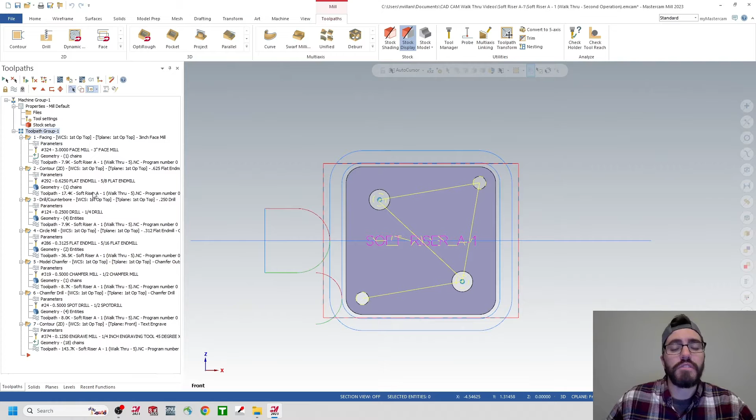All of those toolpaths are out here on the left-hand side in my Operations Manager. I can also see those toolpaths here in my viewport, all those different lines. And if I want to see what that finished result looks like, I'm going to go up here at the top left in the Toolpaths window, and click on that half-pipe looking icon for Verify.

We can see what those toolpaths will look like as they cut against the stock material. So when I hit play, we can see our face mill as well as our contour, and then we hit these 4 drilled holes, and now we're opening up the 2 oversized holes with circle mill.

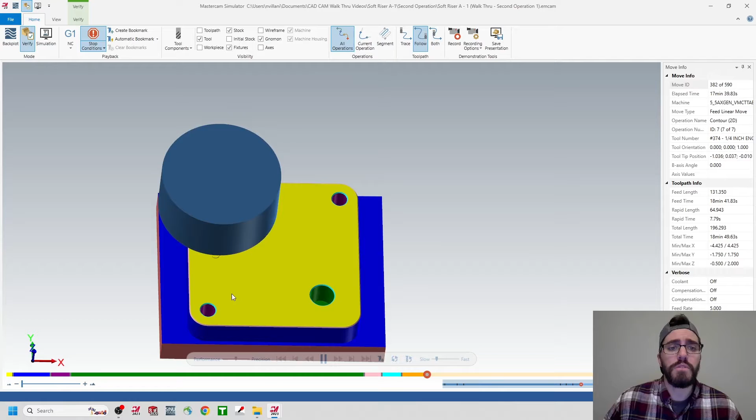We'll clean up the outside edge with a chamfer mill and then a chamfer drill on each one of these holes, and then we engrave the Soft Riser A-1 at the center of the part. And that's going to complete first operation.

As we move into second operation, I actually want to use this finished model here from Verify as my stock material. That's because when we're in second operation, we're eventually going to reach the depths or the extents of our contour mill as well as some of these holes.

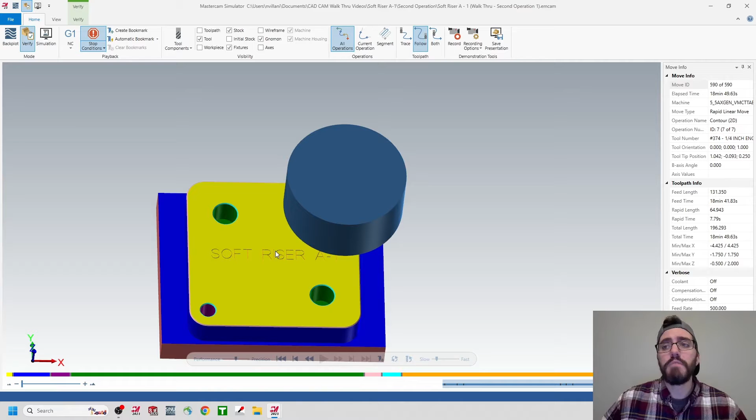Now we're starting to get into this theory of multi-op programming, and that's going to be useful as you start to get out in industry. So let's go ahead and back out of Verify and get started here in second operation.

Let's begin by cleaning up our Operation Manager, that way we can make some room for our second operation toolpath. Over here on the left-hand side in my Operation Manager, all I'm going to do is just hit the minus button next to each one of my toolpath operations.

So here next to facing, there's a minus button. We'll click on that, and that's just going to compress that folder down. We'll continue, and we'll hit that next to contour, drill, circle mill, model chamfer, chamfer drill, and contour.

We can also simply just minimize this entire folder here, so that toolpath group 1, I can hit the minus button next to that. However, that just hides all your toolpaths, so you won't be able to make any changes unless you expand out that folder once again.

So if you want to see them, you just have to hit the plus button next to toolpath group 1, and that's going to bring back all of your toolpaths. Now that we've made some room in our Operation Manager, let's create a secondary toolpath group for second operation.

Now, you have to be careful what you currently have selected. For example, right now I have my toolpath group 1 selected. If I create another toolpath group, it's just going to place that within this folder. And you want to keep those two programs separate.

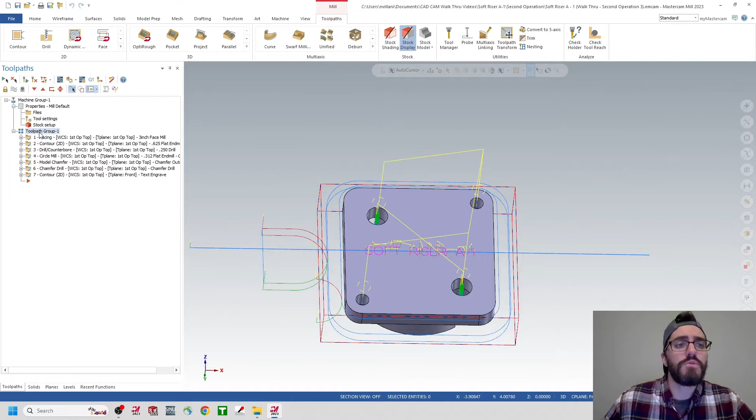So the best way to do this is to come up here to our machine group 1, click on machine group 1, have that selected, right click on machine group 1, then come down here to groups, and you just want to add a new toolpath group.

If you add a new machine group, that's going to add another machine. We want to stay within that machine so that we can maintain our tool library and our stock material. So go down here to new toolpath group, and you'll see that will populate a toolpath group 2 beneath that toolpath group 1.

Now, toolpath group 2 is currently highlighted. It's allowing me to do a text change or a rename. So I'm just going to title this second operation.

And we can do the same thing here to toolpath group 1. All we have to do is click, wait, and click again, and that allows me to open up that text edit box. So I'll click, wait, click again, and now I can rename this first operation. So now we can clearly see what's first operation and what's second operation.

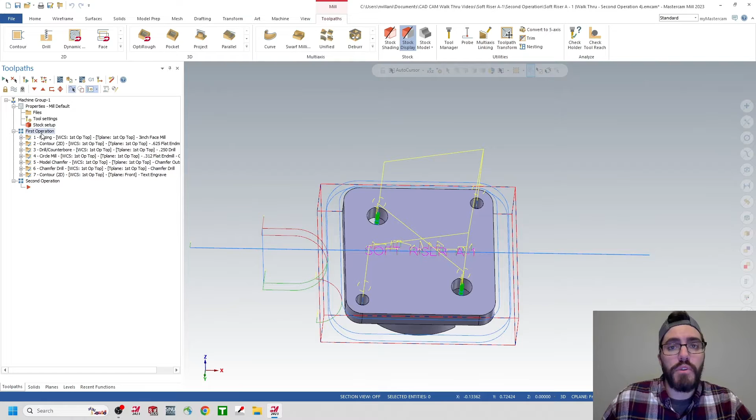So let's go ahead and click on our second operation toolpath group, and I want to make sure that our red arrow is beneath this so that any new toolpaths are going to be created in this folder. Now, when we look at these two operations, they're both beneath Machine Group 1, which means they're driving from the same stock setup that we created for first operation.

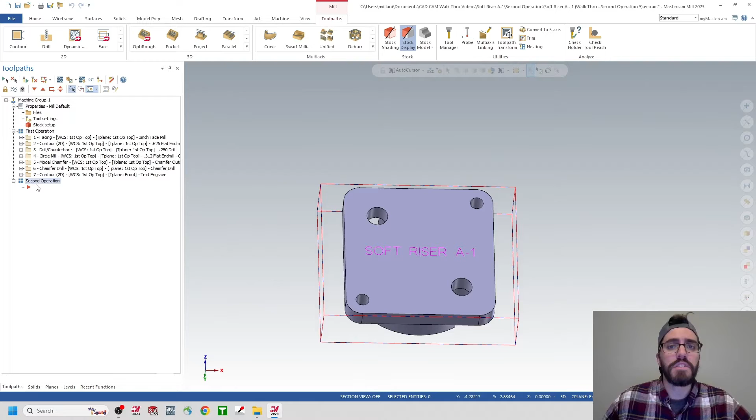However, for second operation, I want to see that finished verified model we were looking at earlier after all of these toolpaths. So let's jump over into our top ribbon bar and find our Toolpaths tab. Inside of Toolpaths, look for an icon called Stock Model, located in the Stock section right next to Stock Display—it's this gray half-pipe looking icon called Stock Model. We'll click on that, and it's going to open up the stock model window.

Beneath the window, we can see in our Operations Manager that we're trying to create a stock model for second operation. So back in the window, let's rename that stock model First Op Finish. Then we can associate a color to the mesh file we're creating so it's a little easier to see our toolpaths and verify.

Over here to the right where it says color, it's currently set to gray. There's a color palette here—if we click on that, it's going to open up this window. I like using something nice and bright so I can see those toolpaths in verify, so I'm just going to click on this pink color right here and hit the green check mark.

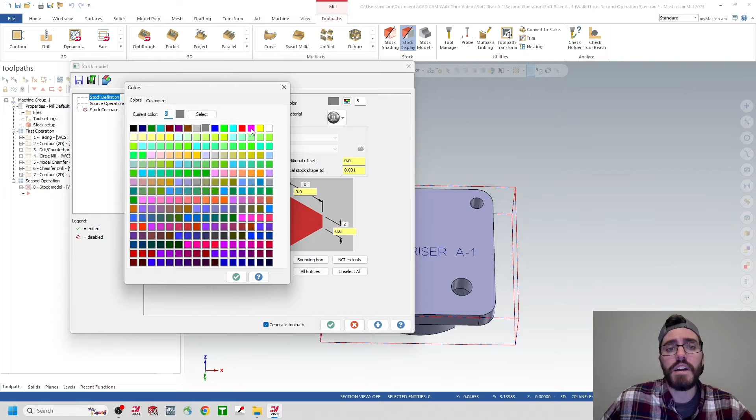Then we're going to work our way down, and we're currently working from the stock plane First Op Top, and that's correct because we want to be pulling from that top plane that we set up for first operation so that all of our toolpaths run against that plane.

As we continue down, it's asking what we want to use for a reference stock material. We've already set that up here in Machine Group 1 where it says Stock Setup, so let's go ahead and click Stock Setup right here. When we click on Stock Setup, it'll actually match up our X, Y, and Z extents.

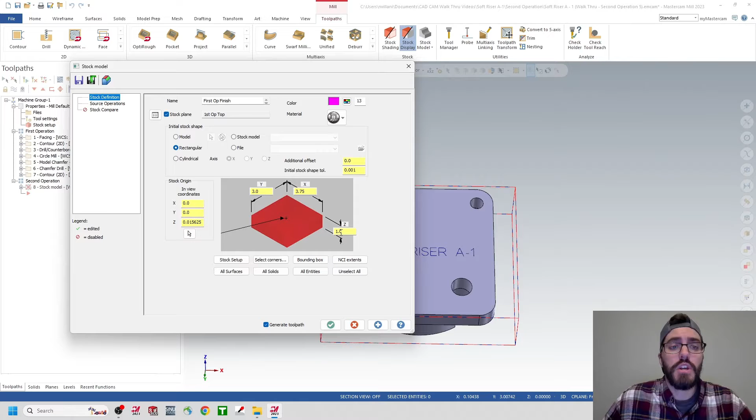Now that we've established our stock definition, we're going to jump down one tab into Source Operations. Inside of Source Operations, all we're trying to do is tell the stock material what toolpaths we want to run against it so that we can create that mesh file.

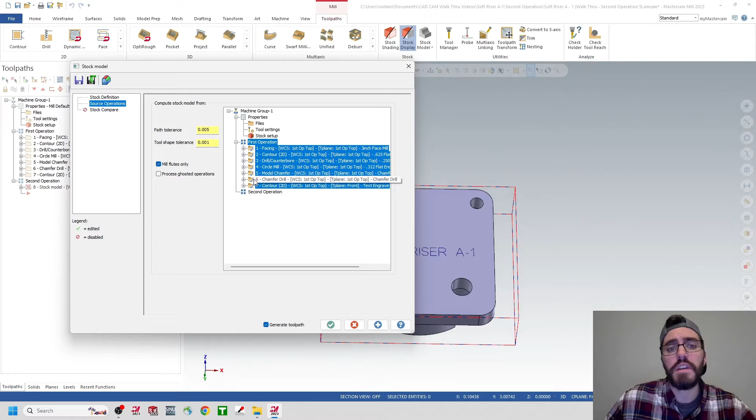So over here, we're just going to select our first operation toolpath group, and we can see that all of our toolpaths have been selected—there's a check mark next to each one. Then when I hit the green check mark, it's going to create that mesh file that we can use as the stock material for second operation.

Now, if you're working in MasterCam 2024 and up, you don't have to reassociate your stock material every time you create one. The software will simply recognize that anytime you have a stock model in your Operations Manager, it's going to be used in Verify while you simulate your toolpath later. However, if you're working in MasterCam 2023 and down, you will need to reassociate any stock model you want to use in Verify under the simulator options.

So on the left-hand side in our Operations Manager, we're going to go to the top of the window and find the icon with three little waves and a gear in the corner—it's actually just to the right of our Verify icon. Click on Simulator Options, and this is going to open up our Simulator Options window, and by default we're always going to be pulling from the stock setup to be used in Verify.

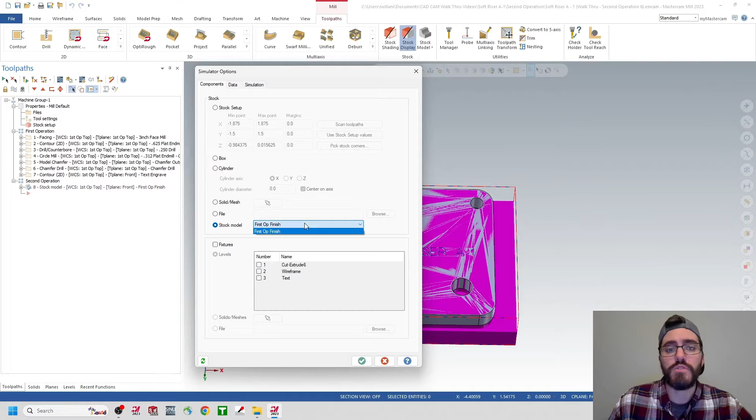We just want to relink this to that stock model we created for that First Op Finish, so go down to the bottom and click on Stock Model, and we can look for the First Op Finish, or hit the drop-down menu and choose from any other stock models you've created. We'll hit the green check mark, and now when we create toolpath, this is going to be used whenever we hit Verify.

So now that I have everything I need from first operation, let's go ahead and create a new plane for second operation so that all of my toolpaths will run perpendicular to the front side of the part. However, I really can't see any of that geometry right now because it's being hidden by the stock model that we just created.

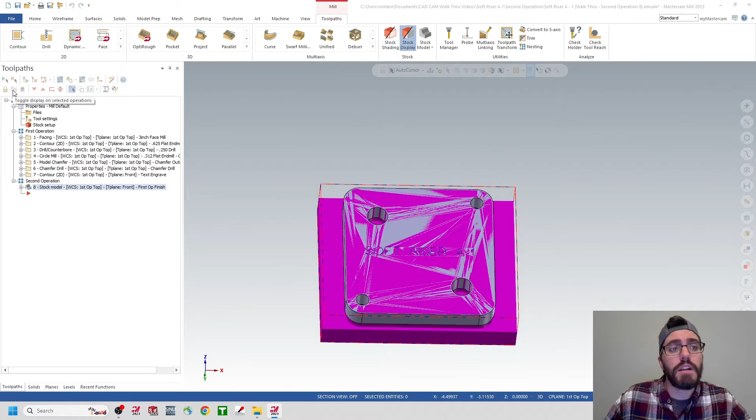So what we need to do is go over to the left-hand side in our Operations Manager. You'll notice that your stock model, the one we just created, will operate just like toolpath geometry. Make sure it's selected with a check mark, then move to the top of that window and find those three waves to toggle the display to selected operations. Clicking on those waves lets me turn my stock model on or off, so I'll turn it off so I can see the top side of my part and create that plane for second operation.

Let's jump down into the bottom left of our Operations Manager. We're currently in the Toolpaths tab, so we'll head over to the Planes tab. Click on that, and we're going to do the exact same thing we did for first operation, where we create a dynamic plane, attach it to the top edge, and then rotate it so that Z is pointing up.

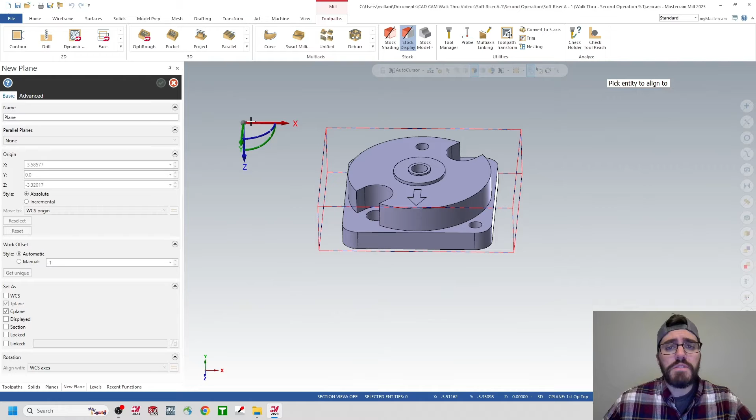Up in the top left where it says Planes, right underneath that, I'll hit the green plus button, expand the menu, and find the dynamic option. You'll notice we have that gnomon attached to our mouse now, and I might need to zoom into my part. I want to line this up with the inside edge of the blind hole at the center of our component, so I'll click on that edge. Then we're going to rotate this around so that Z is pointing up, which means rotating around the X or A axis. I'll click on one of these red segments and stay inside this wheel to get to 180 degrees so Z is pointing directly up.

I'll click right there, and then name this plane on the left-hand side 'second op top.' We'll hit the green check mark, which brings us back into our Planes tab. We want to make sure our WCS and C&T planes are all linked to that new plane we created for second op top — right now they're still linked to the first op top from first operation. So inside these columns and rows, I'll link the WCS here to second op top, as well as the C and the T plane to second op top.

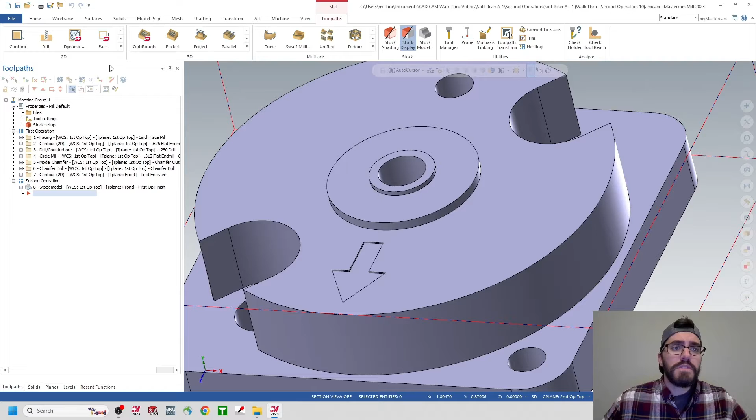Let's jump back into our Toolpaths tab in the bottom left of our Operation Manager — right now we're in the Planes tab, so we'll go over to the left and find the Toolpaths tab. The first toolpath operation we're going to look at is a face mill so we can clean up the top edge of this part. Inside our 2D gallery, we can either expand this out or click here from the top row to find that face mill. Click on face mill, and we're going to treat this exactly like we did for the first operation.

I'm going to zoom out a little so I can see my part better, and change this from solid chaining to wireframe chaining — I can still pick up that wireframe we had from first operation. I'll click on this top edge here, and I can either click the red arrow or click the fast forward for endpoint forward. Click, click, and I'll get a nice yellow box around that top edge. We'll hit the green check mark, and that opens up our parameters window.

We'll jump down into our Tool tab, and this is still pulling the same tool library we were using for first operation because we're currently in the same machine group. So pick up that 3-inch face mill and we'll type a note here for 3-inch face mill. Then we'll jump down into our Cut Parameters, which is still going to pull the same settings we had for first operation. Our cutting method is going to be 1 pass, and exit and approach distance should be 25%.

And the stock to leave on floors should be 0. We'll go down here to depth cuts, and again we're still going to pick up those same settings. So it's going to be 10 thousandths max rough step, and then we're going to keep that tool down.

We'll go down here to linking parameters. Just make sure that each one of these are reading absolute, absolute, absolute, and absolute. Top of stock, we can double check that, but it's 15 thousandths. If we click top of stock here, we can click on the top corner of our stock material, so we are getting that 15 thousandths.

However, the depth should read 0 because we want to go to the top face of that plane we just created, or the top edge of this part. So click on depth, and we just want to click on that inside edge or that top edge of the hole going through the center of the piece. We'll click there, and we can see that it's registering as 0, which matches the second op top plane we just created. So a good double check for us, especially if you're moving from first operation to second operation in the same MasterCam file.

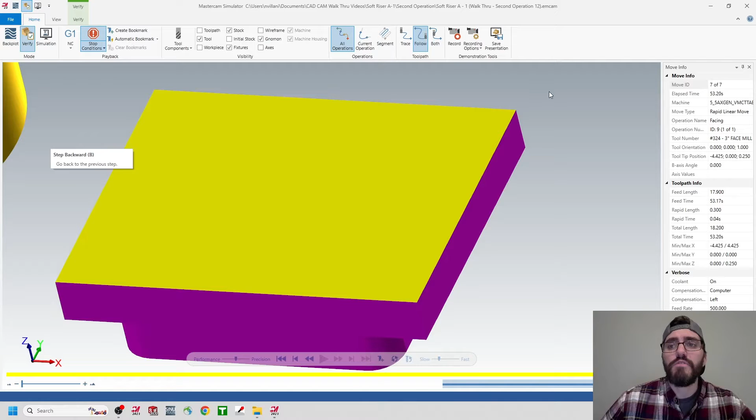So we'll come down here and we'll hit play, and we can see that 3-inch face mill is going to cut across the top, and then it's going to come back. So I think it's safe to say that we set up everything correctly and that we have our second op top in the right orientation, as well as that first op finish for our stock material. So let's back out of here from Verify and we can continue programming.

Now the next toolpath that I want to show you is one of my favorites in all of MasterCam. It's called 2D Dynamic Mill, and we can use this for intelligent metal removal for multiple different applications. So we're going to go over here to the top left-hand corner in our 2D toolpath gallery, and we can either pick from the top row or we can hit this drop-down menu, and we're going to look for this icon with the swirl and then a red arrow attached to it.

So click on Dynamic Mill, and this is going to open up your chaining options, and this toolpath is going to work a lot like face mill and contour mill combined. So we can choose automatic regions, however I want to show you how to set this up manually so you can use it for almost any application. So we're going to come down here to machining regions, and we're going to select this mouse button for select machining chains.

And this is going to be the face mill section of this. Again, this is why I always set up my wireframe geometry to match the stock, because it makes toolpaths like this really easy. So here inside the chaining, make sure you are set to wireframe. We're going to choose the chains, and we're going to select this top edge, and we're just going to go around that top surface like a face mill until we see the entire top face selected there in yellow. We'll hit the green check mark, and now we have to set up our machine region strategy.

So we have to tell the toolpath, do we want to stay inside that selection we just made, or approach from the outside? We don't have any geometry or details to worry about, so I think we can approach this from the outside here.

We'll change this to from outside for our machine region strategy. The last thing we need to do is tell the tool what geometry to avoid as we're cutting the selection. So we'll come down here to avoidance regions and select the avoidance regions chain, which operates a lot like 2D contour. We'll change it from wireframe over to solids, deselect the face option, and we only want to select the loop.

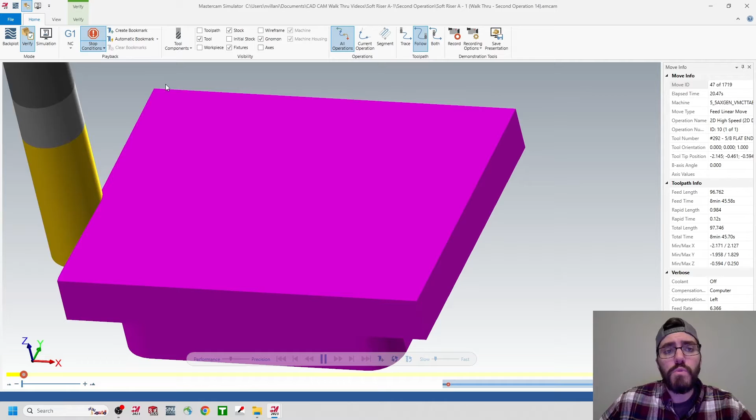We can see the first op finish being used for the stock material of the simulation, and I'm just going to slow down my playback speed so I can talk about this toolpath as it's cutting. So I'll hit the play button here, and we can see as the tool is traveling around the part, we aren't just doing straight up and down cuts. We're actually entering and exiting the part at different depths. We can see that there are radii in some of these corners, and this is to optimize the cut in the most efficient way possible to improve the surface finish and increase the life of the tool. And that's the intelligent design behind the 2D Dynamic Mill.

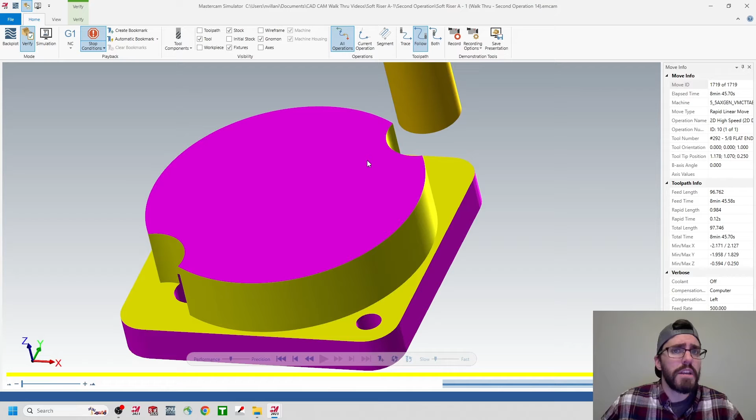As this finishes, I want to compare the verified model against the 3D model that we brought in from SolidWorks, because these cuts here in the corner are looking a little light. So here inside the Home tab, I'm going to go to Visibility, and I'm going to turn on my workpiece, which is going to be that 3D model, and then I'm going to toggle my stock so that it's transparent. You can see that it's not going as deep as I want to, so I actually need to come back and clean up those corners with a separate toolpath.

So let's back out of Verify and look at that next toolpath. Now, the 2D Dynamic Mill worked very well for us, so I want to see if I can use that toolpath again to clean up these inside radii for both of these slots. However, instead of creating a brand new toolpath for 2D Dynamic Mill, where I have to set up my machining regions, my cutting strategy, and my avoidance geometry, why don't we try and copy and paste our last toolpath and make some adjustments to our parameters.

Now, I want you to select that 2D Dynamic Mill that we just created. It should be the last toolpath in our Operations Manager, and when you click on it or have it highlighted, there should be a check mark next to that toolpath and that toolpath only. Just double check this, because if you have a check mark next to any of these other toolpaths, when you go to copy and paste, you could end up doubling your entire Operations Manager, and that could be pretty bad.

So just make sure again that we're selecting that last toolpath and that we have a check mark next to it, and once you have it highlighted, right click on it and it's going to open up this drop down menu for us. We're going to look for the copy command located right here. Click on copy, and that's going to copy that toolpath to our clipboard.

As a good double check, make sure that your red arrow for inserting toolpath geometry is located at the bottom of your Operations Manager. Then right next to that red arrow, go ahead and right click, and we're going to open up that drop down menu again and look for the option for paste. Click on paste, and you can see that we created a secondary 2D Dynamic Mill.

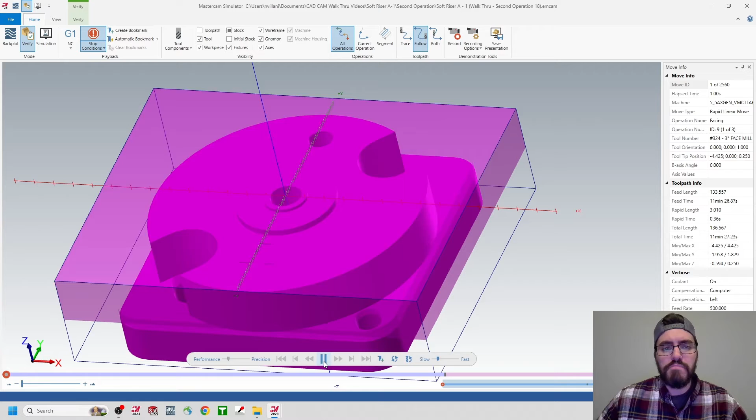I'll hit play. We did our face mill, that was our dynamic mill, and then we went in and added an additional dynamic mill to clean up these slots here. So you can see now we're cutting into that.

However, as this is cutting, I do want to make mention of this. I'm going to move my tool back here, slide this back, and move it all the way back to this pocket at the front. I want to stop this, turn off my workpiece, and make my stock material fully opaque.

Let's take a look at our tool here. This yellow surface we're seeing is our available cutting length, and I don't know what that value is off the top of my head. However, I do know that the depth of this slot is roughly 593 thousandths because we set that up in our linking parameters. So we can see we're getting pretty close to full tool engagement, which leads me to believe we should change our cutting strategy before we post out this program.

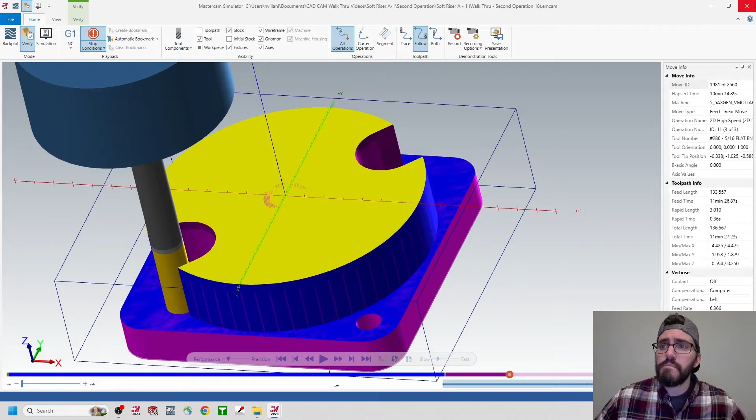So let's back out of verify and take a look at that tool. Let's jump over here into our operations manager and find that last 2D dynamic mill that we were working on.

Just like how we could double click on parameters to open up that window, we can also double click on the tool that we're using. So if you see tool number 286 followed by 312 flat end mill, double click on that. This is going to open up our edit tool window.

I don't want to make any changes here because these are the true values of that tool. However, I can see dimensions for our cutting diameter, which is 312, my overall length, which is 2 inch 500, and my cutting length here, which is 750. If I click on that, I can see it's represented there in that yellow length. So think back to our verify example.

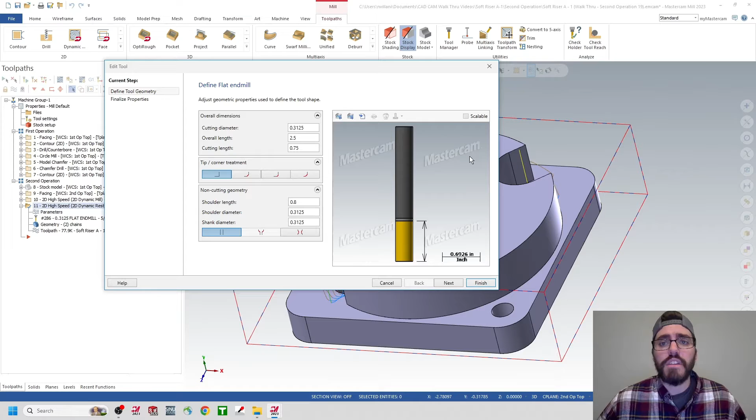Likewise, if we think about that 750 cutting length, we can also think about that depth cut, which was 593. If we just do the math, that's roughly 80% of our tool engagement, and in my opinion, I think that's just a little bit too much. So I just want to keep that in mind while looking at making some changes to my cutting strategy.

Let's back out of the edit tool here, and then we can go ahead and jump back into our parameters. Now, there are really only three options for me to consider if I want to continue using this toolpath. First, I can come up here into my tool, and I can either find a tool with more rigidity or use a bigger diameter.

Second, I can go down here to my cut parameters, and if I want to do something like high-speed milling or HSM, I can use a little bit more conservative approach for my step over distance and change this to like 5 or 10%.

Or third, I can come down here into my depth cuts, and I know I said I don't like using depth cuts for 2D dynamic mill. However, I think this is going to be a great example of how to use containment regions to control our toolpaths.

So let's go ahead and turn on our depth cuts here, and we're going to change the max rough step to the diameter of our tool, which is going to be 0.312. Let's go ahead and hit the green check mark and see how this regenerates.

Alright, so it looks like we were able to separate that toolpath into two depth passes, but now we've created this brown line that's traveling around the outside of the part, leading in and leading out to each one of these slots. I'm not really sure what that toolpath is going to look like, so instead of running a full-blown verify simulation, let's see what this looks like using our backplot selected operations.

Over here on the left-hand side in our operations manager, make sure that you have that 2D dynamic mill selected, and then we'll go to the top of the window and find those three little waves for backplot selected operations. Click on that icon, we can see that our tool is generated out there in our viewport, and from the top left we'll go ahead and hit play.

So we can see that our tool is traveling to that 312 depth for this slot. However, instead of going down to the final Z pass, it's traveling around the outside of the part and doing the 312 depth on the opposite slot.

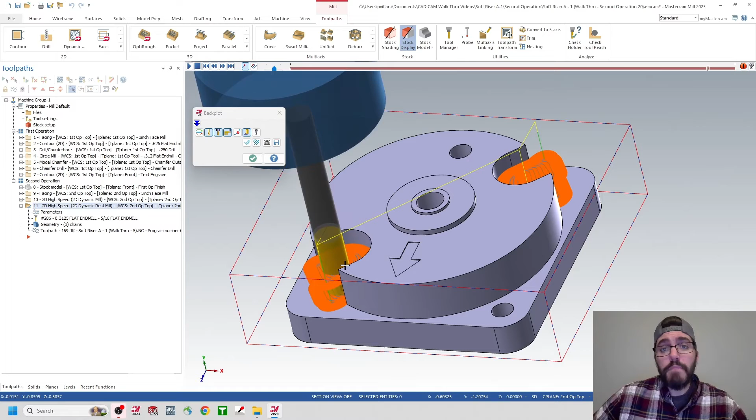I'm pretty happy with the changes we made, especially optimizing this toolpath to cut these two slots.

Let's go ahead and back out of verify, and we can start to look at the next details, which are the circular faces, and then drilling and finishing the part.

Now that we've learned to use 2D dynamic mill to great success, I'd like to continue to use that toolpath to machine away these circular steps.

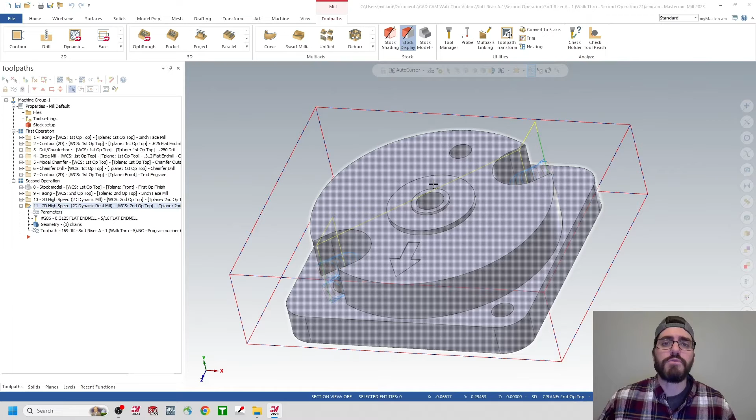But before we create any toolpath geometry, I want you to start to think about your machining parameters. For example, what's going to be your machining region, what's going to be your cutting approach, and what's going to be your avoidance geometry.

For this example, we could set up the outer extents of our stock material to be used for our machining regions. However, we would also have to set up our rest material to recognize that we did machine these details away. Likewise, we could use the outer extents of this surface and try to create one nice circular contained region, but we are going to be interrupted by these slots.

So I think in this example, it's probably best just to create our own machine region geometry as a separate wireframe level. Let's just jump down here into the bottom tabs of our operations manager.

We're currently sitting here in toolpaths. We're going to jump over here to the Levels tab. Inside of Levels, we're just going to go up to the top left corner and find that plus button right beneath Levels. We'll click on that to add a new level.

We'll double click on that level and we're going to name this Circle. All right, so we currently have 0 entities on that circle level. So we just want to add or create wireframe geometry.

Up here in the top ribbon toolbar, we're currently in the Toolpaths tab. We're going to go all the way over here to the left and find wireframe. Click on wireframe, and I want you to find the circle center point icon. We'll click on that circle center point icon.

It's going to be asking where we want to drop the center point of the circle, and we can just make it coincident here with the center of this drilled hole. We'll click once here, and then we're going to drag this circle out or move our mouse out, and we just want to make it coincident with the endpoint of one of these edges of the slot.

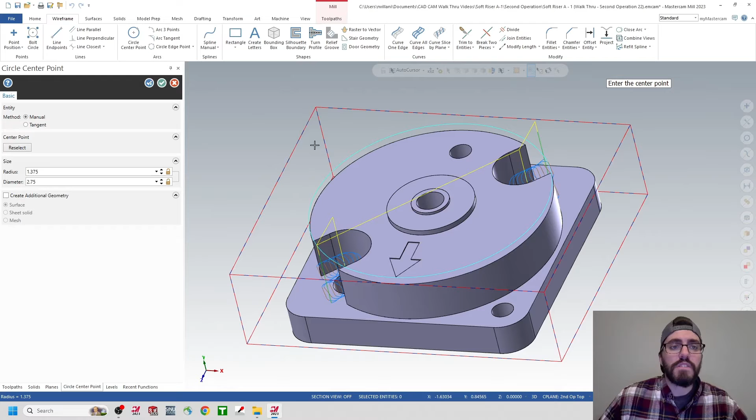I'll click on one of these edges. That circle should match up 1-to-1 to that. We do see that it does have a diameter of 2.75, which is that value. So we'll hit the green check mark, and now we have one entity on that circle level.

We can either hit the drop down to expand out the gallery, but we're just trying to look for our dynamic mill option. Click on dynamic mill. We're going to select our machining regions.

We'll select this chain and toggle it back from solids over to wireframe. Then we just want to chain that circle that we just created. That's going to be our machining region, and we are going to machine this from the outside.

Now for our avoidance region, we're just going to do this first step here. So we'll click avoidance region, and we will have to toggle it back from wireframe over to solids.

We're going to turn off the face here, but we do want to be selecting from these loops. So I'll just jump down to the top or outside edge of the circle and select on that so this will be our avoidance region. We'll hit the green check mark.

We've now set this up so our machining region is that outside wireframe circle we created. The approach strategy is going to be from the outside, and our avoidance region is going to be this center section here so that we don't cross over and cut through that hole.

So we'll hit the green check mark, and here we'll open up our parameters window. We'll jump down into tools. We really don't have to worry about any geometry here, so I can use a bigger tool. We'll use the 5/8 flat end mill. I'll leave a note here for 0.625 end mill, and we'll just say first circle.

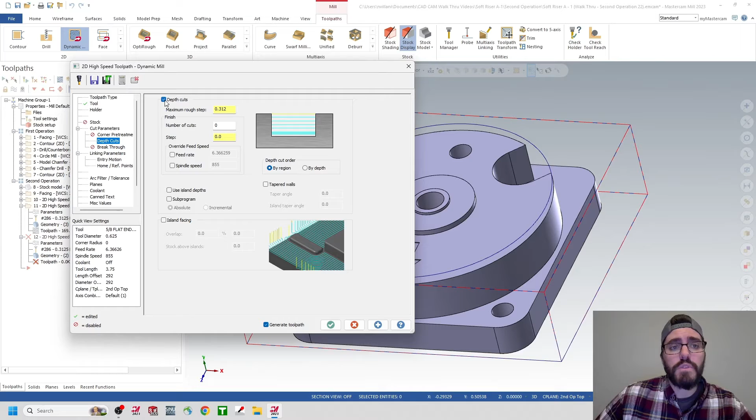We really don't have to worry about any depth cuts here, so we can turn this off. Then we'll jump down into our linking parameters. Inside of linking parameters, always make sure that we are reading absolute, absolute, absolute, absolute.

Top of stock is a little off. It's still recognizing the stock material, so we'll click on that, and we do want to select on this top edge so that it registers as 0. And then the depth, we'll click on that.

It's still reading 0, but we want it to register this first step or the first circle. So we'll click on that, and we do have a value of negative 0.09375. Once we have all these parameters set up, we can go ahead and hit the green check mark, and we can see that we've created this nice circular toolpath that's spiraling to the center of our part.

So I'm happy with how that looks. Why don't we just use what we've learned in the past and copy and paste the toolpath, and just make some slight changes in our parameters?

So I'm going to make sure that I just have this 2D dynamic mill selected and not any other toolpaths, because if I see a check mark next to them and I go to copy and paste it, I will copy those other toolpaths too. So we're just going to select this last toolpath in our operations manager.

We'll right click on it, we'll get this drop down menu, and we're going to look for our copy option. Now we're going to look for our red arrow and make sure that that's beneath this 2D dynamic mill, and then we're going to right click to the right of that red arrow.

So I'll right click. This is going to open up my drop down menu, and I'm going to look for my paste option. So we'll click paste, and we can see that we've now copied and pasted that 2D dynamic mill, the one with the circle and the spiral going all the way to the center of the part.

So for the last toolpath, the one we just created, I want to make some changes in my parameters. We'll double click on parameters, and this is going to open up my parameters window. I'm just going to go up to the top for my toolpath type, and inside of toolpath type, our machining region is currently linked to that wireframe circle we created, and that's just too wide for the circle that we want to do for this next step.

So we're going to deselect this machining region. We have remove selected machining chains, so we'll select that icon right there. We currently have no machining regions selected, so we want to select machining regions. We want to make sure that we are picking from our solid chains and that we only have our loops selected. I'm going to select the next step here, which is going to be this circle. This is going to be our machining region. We'll hit the green check mark.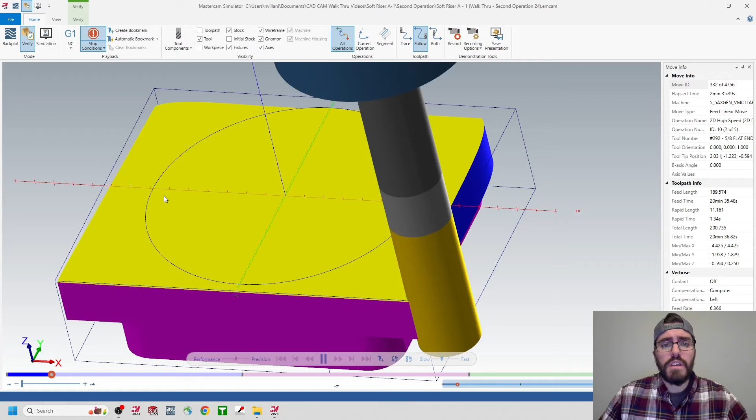We can see that we have our face mill, our 2D dynamic mill, and then we came back and cleaned up both of those slots. And then we have that nice spiral toolpath that's going to the center of our part for both of these circular steps.

I hope that you can gain an appreciation for how powerful 2D dynamic mill is, because we basically used that toolpath over and over again, just making slight changes in our parameters.

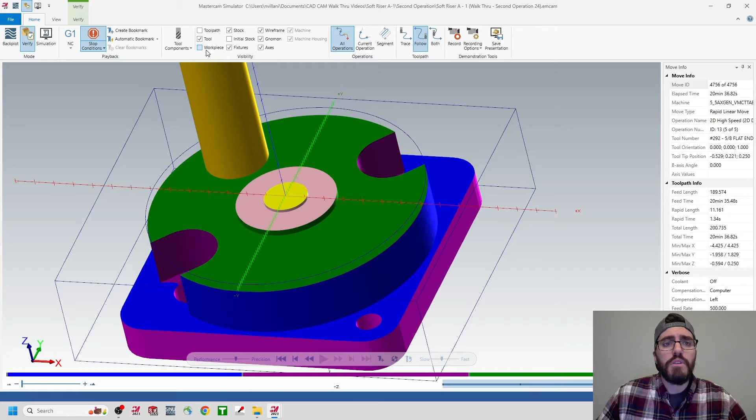So why don't we check this verified model against our master 3D model? We'll jump into our visibility tab and turn on our workpiece, which is the master 3D model, and toggle our stock so we see through it transparently. Right now I'm not seeing much difference between these two models, other than some holes and this arrow pointing down.

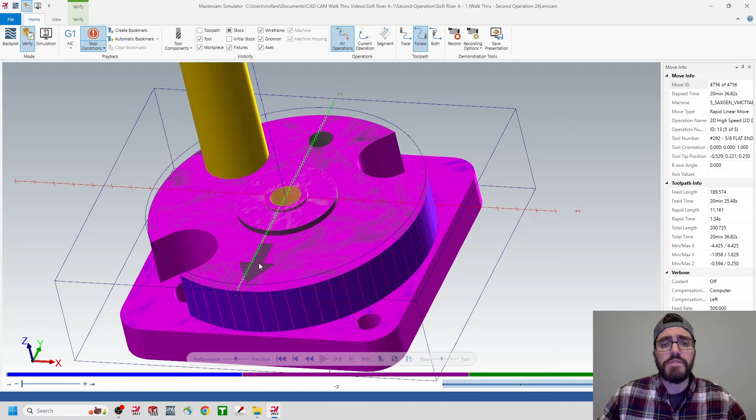I think we did a great job cleaning up most of this part using 2D dynamic mill, and we can move on into some of these finishing operations. So let's back out of Verify and start to look at those toolpaths.

As we've talked about before, we should try to keep our workspace organized. Right now I have all of my toolpaths from second operation visible, and I just want to toggle those off. Over here on the left-hand side, we still have our second operation selected from that verify command, so I should see a check mark next to every single one of these toolpaths.

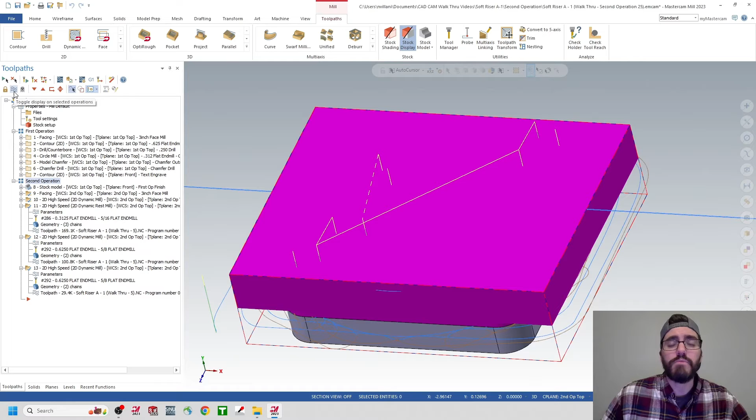I'm going to go to the top of the window, and right above the words Machine Group 1, find these three little waves. I'll click on that to toggle my toolpath on or off, turn these off, and then compress down some of these file folders for these other toolpaths, so I have a nice clean workspace to start looking at these drilling and finishing operations.

So let's start by drilling a 250 hole to open up this locating pin at the top of our part. We want to be here in our Toolpaths tab in the top ribbon, and over here on the left-hand side, in the 2D gallery. We can expand this out or choose the drilling icon from the top row. I'll click on Drill, which opens up my drilling properties bar, and I just want to select on that top edge of this 250 hole for that locating pin.

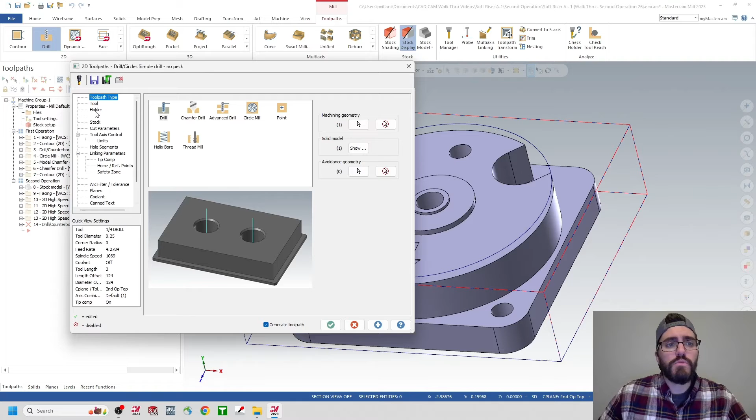I do see that it is a 250 diameter. I can hit the green check mark, which opens up our parameters window. We'll jump down into our tool tab, and we still have a 1/4 inch drill active in our tool library from first operation, so let's select on that. For our comment, we can say 0.250 drilled hole.

Then we'll jump into our cut parameters. If we wanted to, we could hit this drop down menu and change it to peck drill. However, this isn't a super deep hole, so I think I can just leave this as drill counterbore.

I'll jump into my linking parameters, and we just want to make sure that we are still reading absolute, absolute, absolute, and absolute. Top of stock is not going to be this 0.015625, and it's not even going to be 0, because this face here is actually below the Z0 position.

So let's click on our top of stock, and we want to reassociate this to the top edge of this hole, or the outside edge of this hole. We'll click on that hole right there. We can see that we are below Z0, at a negative value of 0.09375.

However, if we look down at our depth, we're seeing the same value in both of these parameters, and that's because when we started the drilling feature, we actually clicked on that edge for this hole. So we will have to reassociate this depth to the shoulder of the drill tip.

We'll click here on depth, and I can't see this right now, so I'll have to rotate my part just slightly until I can see that shoulder at the bottom of the hole. I'll click on that shoulder, and I can see that we have a depth value of negative 0.65625.

As a good double check, let's make sure that our tip comp is on. So we'll come down to tip comp. We do want to have that selected or turned on, but our breakthrough amount, we don't want to break through anything because we're trying to go to a blind hole depth.

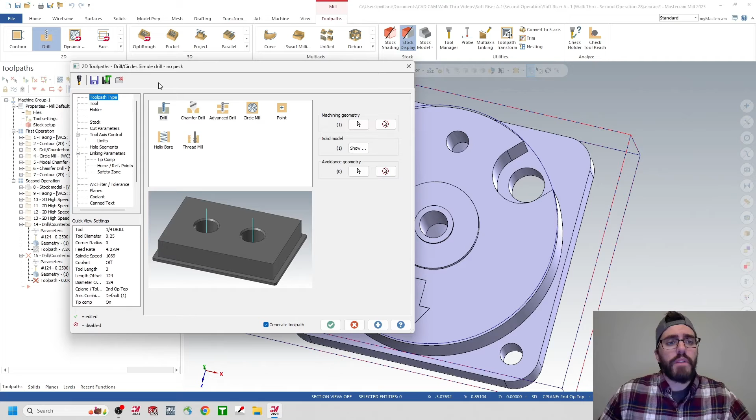This is going to open up our parameters window. We'll jump down into our tools tab, and we'll see that we don't have a 5/16 drill currently available in our tool library, so we'll have to add that from select tool library. We'll keep scrolling down here until we see a value in our diameter column for 312, and that's going to be our 5/16 drill, or tool number 137. We'll hit the green check mark, and that'll get populated here in our tool library. Make sure that you click on that. Then we'll say our comment here is going to be 0.3125 drilled hole.

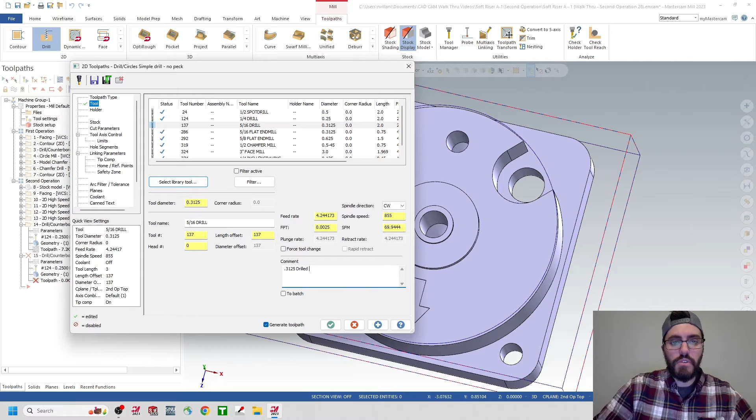Okay, so then we'll jump down here to our cut parameters. As I've said before, we can just leave this as a standard drill counterbore. However, I do want to show you what that peck drill detail looks like. So you can hit the drop down menu here and find peck drill. Our peck depth value is just going to be set to 0.125, or an eighth inch, every time that we peck that drill down.

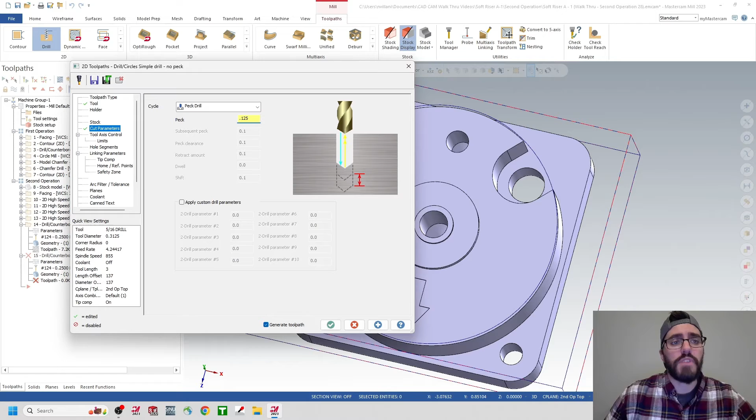So then we'll jump down here to our linking parameters. Make sure that this is set to absolute, absolute, absolute, and absolute. We will have to reassociate our top of stock and our depth, so go ahead and click on top of stock, and we're going to reset this value here to the top edge of that hole. Our depth here is still reading 0 because that was the edge we selected when we started our drilling feature. So we'll have to click on depth and reassociate that to the shoulder edge of that drill tip. Click down there at the bottom, and we can see that we have a value of negative 5/8.

Now, one thing I want to mention before we move forward is this retract detail. Whenever we activate our peck drilling, we're going to peck drill down a depth in sequence that we set up, which before we set to an eighth inch. So every time that we peck down an eighth inch, we're going to have to retract out, and that retract value is right here. Right now we're set to a half inch absolute, which means that every time we peck down an eighth inch, we're going to move that tool out a half inch above the part before we move down to that next eighth inch.

So in theory, you could set this to incremental and change this to a smaller value, like an eighth inch. So you'd peck down an eighth inch, retract up an eighth inch, go down an eighth inch, retract up an eighth inch, and so on. But I think we can still set this to absolute because I'd like to have those chips evacuate. So I'm just going to change this retract value to something smaller, 0.125, so that every time we peck down an eighth inch, we're still going above the top of the part, but just at a smaller value, an eighth inch. Keep that in mind whenever you're doing peck drilling, because you could have that retract value set to stock or standard, where it's like a half inch or 1 inch above the part.

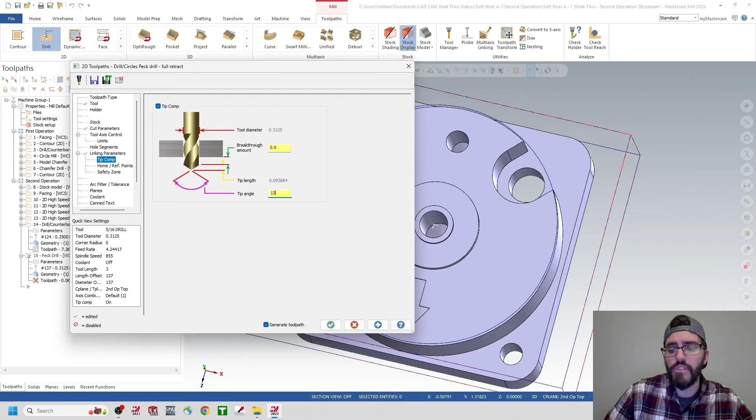And then as a good double check, let's just make sure that we have our tip comp on. I'll go to the tip comp tab right below linking parameters, and we want to make sure that tip comp is activated and the breakthrough amount is set to 0, because this is a blind hole. The tip angle should match what you have in your tool library. By default this would be 118 degrees, but in our tool library we have 130 degree drill tips. So we'll hit the green check mark and see how that regenerates.

All right, so it looks like we have that 312 peck drill at the center of our part. I just want to check this out in backplot to make sure we're retracting out that correct value. Let's move our model so it's easier to see, shift it to the center of the screen, and select that peck drill from the left-hand side of the operations manager. Then go to the top of the window and look for those three little waves for backplot selected operations. Click on that icon, we can see the tool simulate out in the viewport, and we'll hit the play button from the top left.

So this is going to be our clearance distance, and then once we hit the part, we're going to start peck drilling down that eighth inch. But every time we hit an eighth inch, we're going to retract out absolute eighth inch above the part. Again, this allows for those chips to evacuate, so we're kind of pulling those chips with us as we retract out. Once we hit the bottom of this hole, we're just going to retract all the way out to that clearance distance, and that's going to be your peck drilling operation.

So let's back out of backplot, and we can take a look at putting an edge break on both of these holes. I'll click X on this window, and as we mentioned in the last video, we have the option to do a model chamfer or a chamfer drill. My preference with holes is to use that chamfer drill, so we're going to follow that exact same workflow from that video. Up in the top left-hand corner, we'll hit the drop-down menu to expand this gallery, and look for an icon called chamfer drill. It's in the hole making section, first row, second icon over. We'll click on chamfer drill.

Now we just want to pick on the top edges of the holes we just drilled - the center 312 drill, so I'll click right there, as well as that 250 hole for the locating pin. We do have the option to include some of these drilled holes coming through from the first operation, for example this 400 through hole as well as this 250 through hole, but I think these holes are a little too close to the surface here, and it's going to cause that drill to collide with that edge. So I want to show you a bad example and how to use check collisions to our advantage.

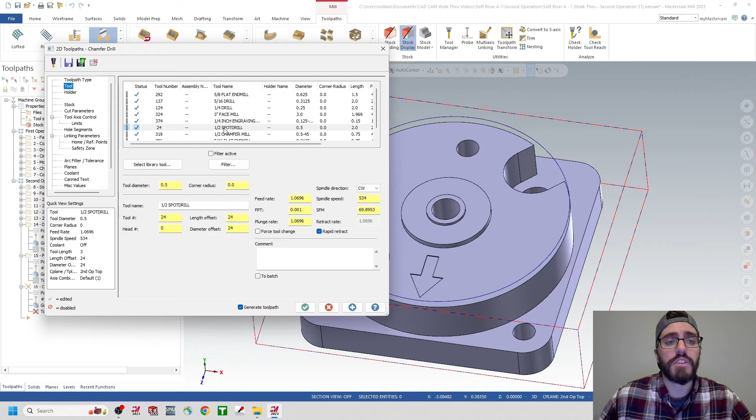This is going to open up our parameters window. We'll jump down into the tool tab. We still have that tool library active from first operation, so I can select that half-inch spot drill - it's tool number 24, and the comment here is just going to be chamfer drill. I'll jump down into my cut parameters - I still should have the same settings active, so my depth here is going to be 15 thousandths, which means we're going to put a 15 thousandths chamfer on each one of these edges.

We'll just jump down here into our linking parameters. Inside of linking parameters, make sure that we are reading absolute and absolute.

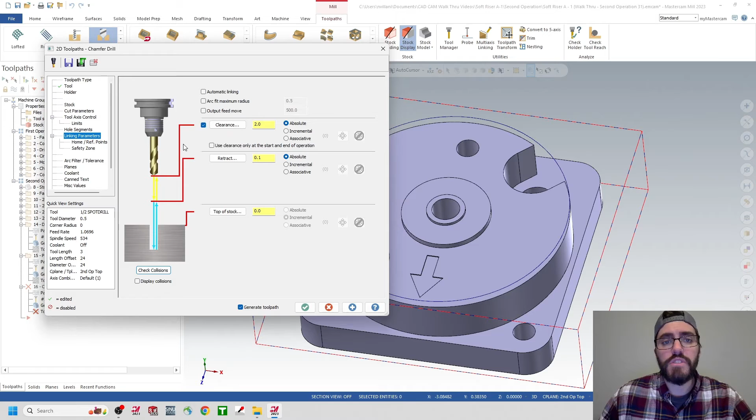The top of stock should be 0 because it's registering from that edge that we just selected. So let's take a look at this check collisions option here inside the linking parameters.

There's an illustration of a drill, and right beneath that there is an icon for check collisions. Click on that icon, and this is going to open up a miniature backplot for you. As I select through some of these entries from this top window, I can actually simulate that chamfer drill moving from one hole to another.

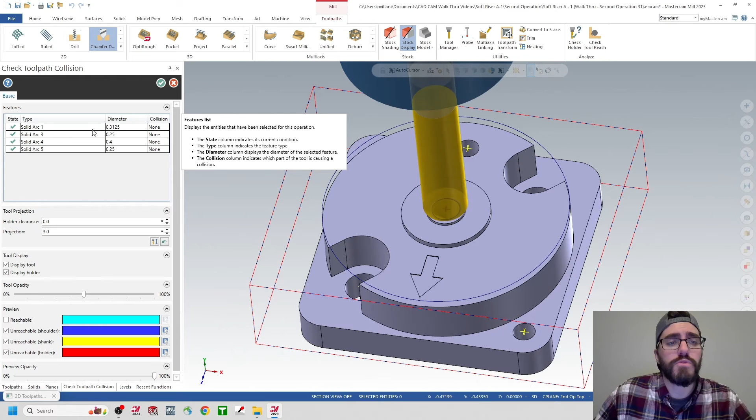I'll click on this first entry, which is going to be that 312 hole. I can see that there are no collisions. I'll click on the next entry, which is going to be the 250 locating pin. Once again, there are going to be no collisions.

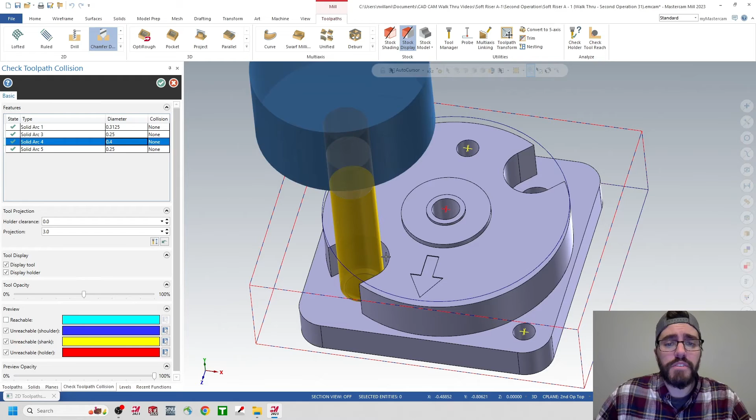And then I'll start to move into these through holes that are coming through from first operation. I'll click on that 400 size hole, and we can see that that drill is getting pretty close to these edges. However, we still do have clearance, and I do not have any collisions active.

But when we jump down into that 250 hole, I can clearly see that the drill is colliding with this edge, even though it says that there are no collisions. So you can see that this is a great way for us to double check our selections and ensure that we will not collide or crash with the part.

So I will be removing that 400 size through hole as well as that 250 size through hole. Over here in the top left hand corner inside this window, I'll select that 400 size through hole, right click on it, and delete it. Then I'll select that 250 size through hole, right click on it, and delete it. That's going to update our selections.

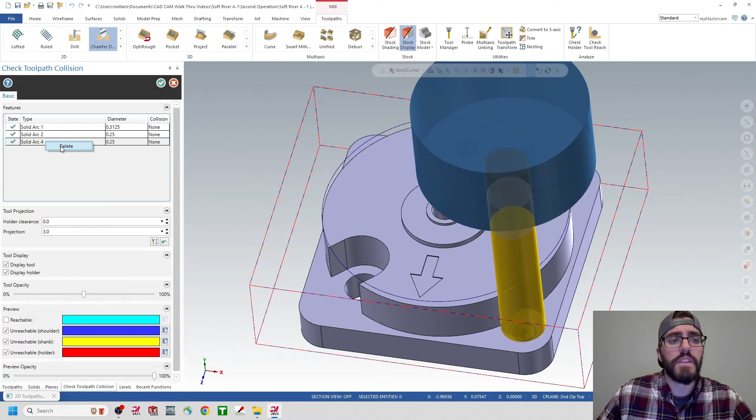We'll go ahead and hit the green check mark, and then we can hit the green check mark once again to generate that toolpath. So let's move into chamfering the rest of our part so that we have no sharp edges for someone to cut themselves on.

We're going to use that model chamfer feature like we did in the first video, so again we're just going to follow the same workflow. At the top left-hand corner, we're going to go into our 2D gallery. We can hit the drop-down menu to expand this out, and we're going to look for an icon called Model Chamfer. That's going to be on the third row, third icon over, Model Chamfer. Click on that icon, and this is going to open up your parameters window.

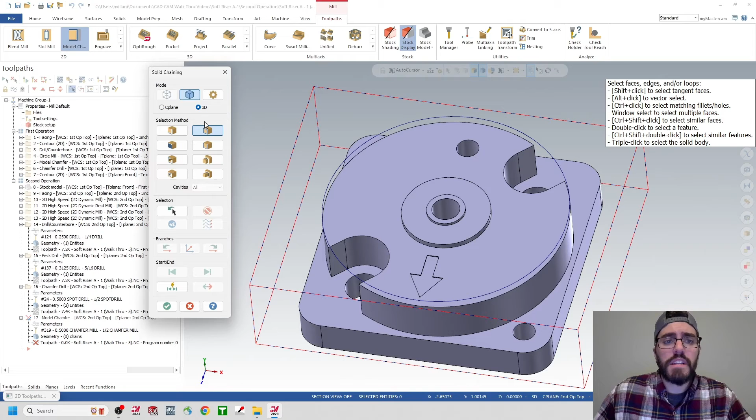Now again, I don't know why by default it just doesn't have you start chaining geometry, so you will have to go over to the right side of this window. Click on Select Chains, and we only want to be selecting from loops. If you have faces selected, deselect that.

We'll pick the top edge of this first circular step, and we want to make sure that we are going around clockwise so that we are climb milling. And then we'll also select the top edge of the shoulder. This will give us some issues later, but I want to show you how we can troubleshoot this. Click on that top edge, and we can see that it is going around clockwise for climb milling.

We'll hit the green check mark, and then we'll jump down into our tool tab. We still have this tool library active from first operation, so we want to pick on that 1/2 inch chamfer mill, which is going to be tool number 319. I'll put a note here for chamfer edges, and then I'll jump down into my cut parameters.

I should still have the same settings, so we want to make sure that we are putting a 15 thousandths chamfer, and we can leave that bottom offset as 50 thousandths. We don't want to make any changes to depth cuts. If we go over here to lead in, lead out, we want to make sure that that is activated.

And then we'll jump down into our linking parameters. This does not give us an option to set absolute, absolute, absolute. However, this is going to rely on those edges that we selected. So we can hit the green check mark and generate this toolpath.

Alright, so as I said before, I knew clicking on that top edge of the shoulder was going to cause some issues. So we will have to troubleshoot this so our toolpath isn't interrupted. And the reason why this is happening is because we're using a 1/2 inch chamfer mill.

As we're coming around this edge, we are going to collide with the sidewall of the circular extrusion. So we could do one of two things. We can try to use a smaller chamfer mill, and that could work if we bring it all the way down to like an 1/8 inch.

However, I want to show you another option, and that's to use a ball mill to chamfer edges we can't reach. So let's update the parameters of this chamfer mill to remove that edge that's currently being interrupted by that circular surface. Jump over here into the left-hand side in our operations manager.

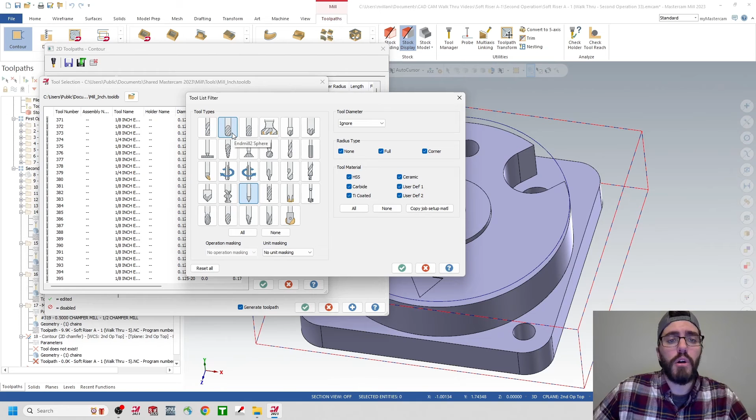So we'll go over here to filter. I'm going to find my second icon for End Mill 2 sphere, so that's going to be our ball mill. And then we're also going to deselect our engraving tool. We'll hit the green check mark.

And you can see here we have all these different ball mills. I'm going to look for the 1/8 ball mill, which is going to be tool number 304, and then we'll click the green check mark. We can see that that tool got added to our tool library. Just make sure that you select on that. And then we also leave a note here for ball mill chamfer.

Then we'll just jump down here into our cut parameters. Our compensation type is currently off—this is remembering from when we were trying to do our engraving. So I want to turn this back on. We'll hit the drop down menu and we'll just update this to computer. Additionally, by default, our contour type is set to 2D. However, when we're trying to do chamfers, we do have to update this. So we'll hit the drop down menu and we'll change this to 2D chamfer.

And it looks like the toolpath is recognizing that we are trying to use a ball mill, so I just need to update my chamfer width and my depth. Let's think about this as a 45-degree chamfer, so both of these values should read the exact same. I'll update my width here to 0.015, and the depth should also be that 0.015, or 15 thousandths.

Then we'll jump over here into our lead in and lead out. We can turn that on because we aren't doing an engraving, so we're not going to cause any collisions while we're trying to cut this chamfer.

Then we'll jump down into our linking parameters, make sure that we are reading absolute, absolute, absolute, and absolute. Top of stock, we can update that to the top edge of that shoulder. So if I click on top of stock, I'll just click on one of these edges here for that shoulder, and I'm getting a value of negative 0.53975.

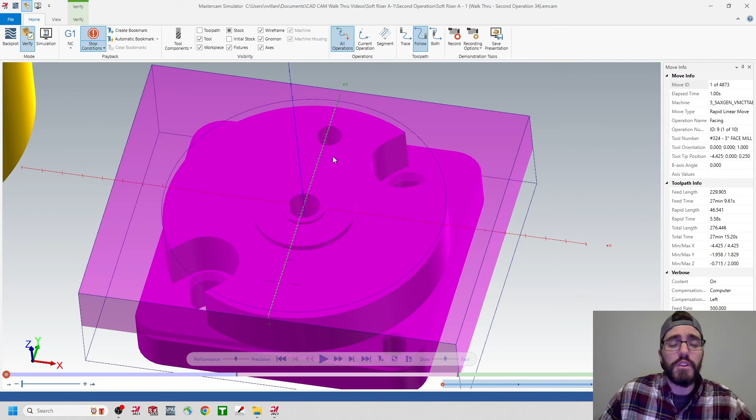This is going to open up that secondary window for us, and we can see our stock model as well as our master 3D model beneath it. I'm just going to toggle this through so I turn off my workpiece, and then I want to make my stock model completely opaque. So we'll hit play and let this run out, and I'm just focused on seeing how these edge breaks worked out for us.

So we can see that we cleaned up both of these holes here using a chamfer drill, and then we hit the entire outside edge of this first circular step using a model chamfer, or that chamfer mill. And then we even cleaned up that shoulder there, as well as these deep holes that we were previously hitting with the chamfer drill, using a ball mill without colliding on the sidewall of this circular surface.

So let's take a look at our last two details, which is going to be adding this arrow here at the bottom of the part, as well as threading this 3/8 by 16 hole. So I'm going to back out of Verify, close this window. Let's start by cleaning up our Operations Manager.

We've been working on quite a few toolpaths, and we have all these different folders opened up right now. So I'm just going to close these, or collapse these down, so that I have some space here to add more toolpath. And then we still have our entire second operation highlighted or turned on because we were just looking at it in Verify. So as long as your second operation is selected, we're just going to click on the three waves right here above Machine Group to toggle off our toolpaths.

And then we're going to engrave this arrow here at the bottom of our part, and we're going to follow the exact same workflow we used to engrave the text on the backside for first operation. So up here in the top left in our 2D gallery, we can hit the drop-down menu and expand out this menu, or we can choose Contour here from that top row.

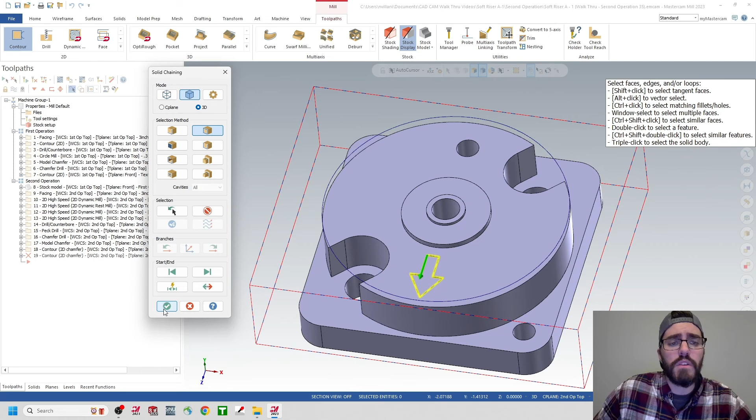So we'll click Contour, and then we do want to be selecting here from 3D solid chains, and we only want to be selecting with loops. I'm just going to select this arrow, and it doesn't really matter which direction that we're going. We're just going to be engraving here. So hit the green check mark, and then we'll jump down here into the tools, and we want to find our engraving tool, which was that 1/4 inch engraver that we used in first operation.

That's tool number 374, and we'll just say engrave arrow for our note. Then we'll jump down into our cut parameters, and we do have to toggle this back because we were using contour for chamfers before, so we're going to change our compensation type to off.

We'll hit the drop down menu and change this to off. Then our contour type, we do have to change it back to 2D, so we'll hit the drop down menu for 2D chamfer and change that to 2D.

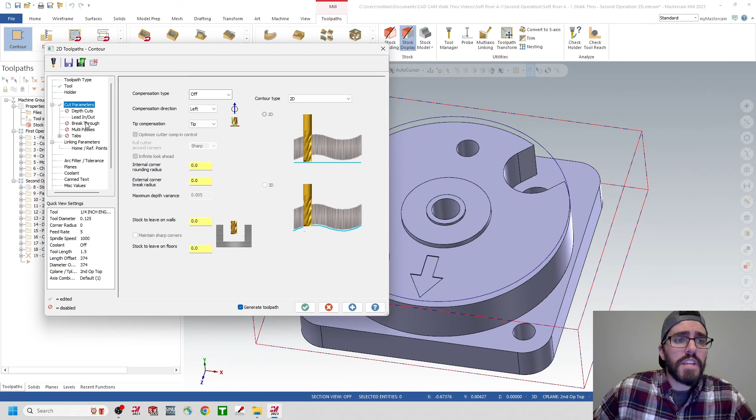Inside of lead in and lead out, we do have to turn that off because we don't want those tails to be following with this engraving. So we'll turn lead in and lead out off.

Then we'll jump down into our linking parameters, and we want to make sure that this is reading absolute, absolute, absolute, and absolute. Top of stock, we do have to update, so we'll click top of stock and click on the top edge of that arrow. We see that that is negative 0.09375.

For this depth, we can go about 10 thousandths lower, so if I wanted to, I can just go ahead and say minus 0.01 here from this value, and that would put that depth of the cut about 10 thousandths below that surface.

And if you wanted to, you could actually change this to incremental for this one instance. You could say incremental, and say minus 0.01, and that would also put that 10 thousandths below this surface that we established for top of stock.

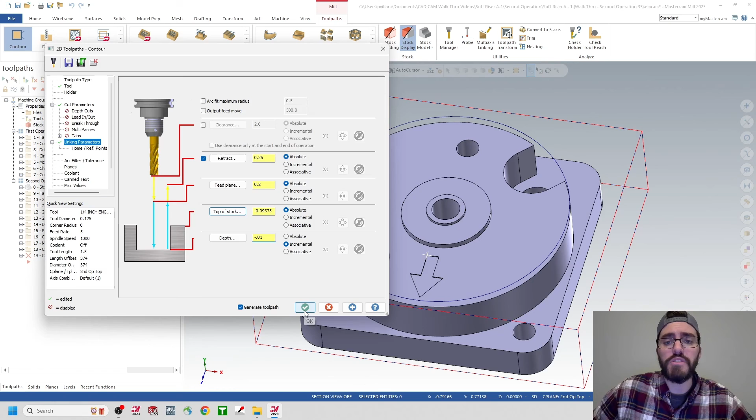So let's go ahead and hit the green check mark and let that regenerate. We can see that we are engraving that arrow there.

Now we're going to move into our last toolpath, which is just going to be adding a 3/8 by 16 threaded hole here for that center detail.

As a disclaimer, the default tool library that we're using doesn't have a lot of options for threaded mills, so we do have to create a new tool to be used for our threading toolpath. That should be relatively easy as long as we have all the dimensions.

So we're just going to jump up into our tool manager located in our toolpaths tab. Click on tool manager, and this is going to open up your tool library window. Now, this top area of the window is going to be all the active tools in your part or your current tool library.

This bottom area of the window can be set up to be an entire tool library, so like all of your tools on your shop floor, and then you can pick and choose what tools that you want to include in a specific machine.

Right now, I just want to add a tool in this specific machine, so I'm going to right-click in the top area of this window, and then I'm going to select Create Tool from that drop-down menu.

This is going to allow you to create a tool for your tool library, and we have all these different options from flat end mills to bull end mills to ball end mills, so on and so forth.

But we're going to look for an icon called thread mill. This is going to be in the fourth row and the third icon over. So we'll select thread mill, we'll hit next, and now we can start to establish some dimensions or geometry for that tool that we're creating.

Now we are going to be working here in UNC threads, and as I mentioned before, we're going to be using a 3/8 by 16 thread, which means that we have 16 threads per inch. So down where it says threads per inch, we're going to update this from 20 to 16.

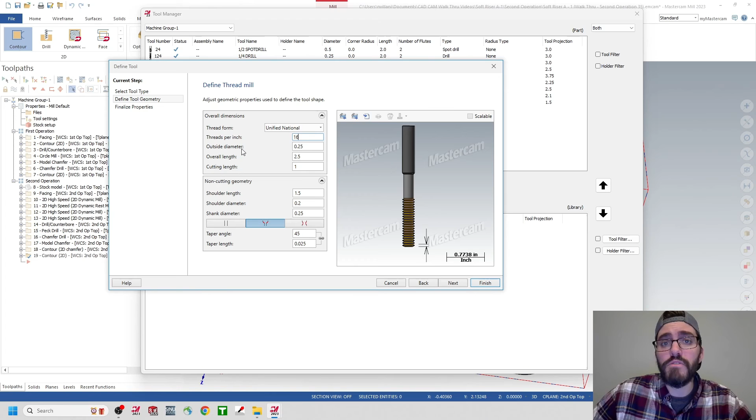So now that we have 16 threads per inch, for the outside diameter, we're going to make this a little bit smaller than the actual thread size. So this isn't going to be like 0.375 or 3/8, and we want to make this even smaller than the minor diameter, which was the 5/16 hole that we drilled earlier.

So I want to change this outside diameter here to 0.3, a little bit smaller than that minor diameter, so I can plunge that tool inside of that hole.

The overall length we can leave the same. However, the cutting length, we want to limit this to 1 tooth. So right now we have cutting length of 1 inch, and that would mean that we have 16 threads in that 1 inch.

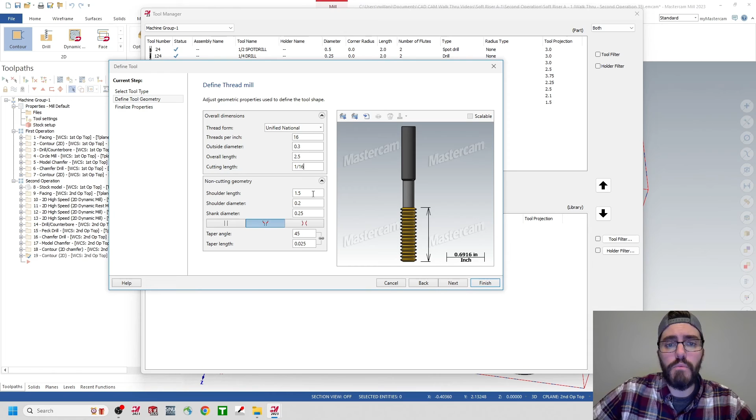So I'm going to change this here to 1 divided by 16, and then I'll click on one of these other boxes so I can calculate out. I'm only trying to create 1 tooth, so that's going to be 0.0625.

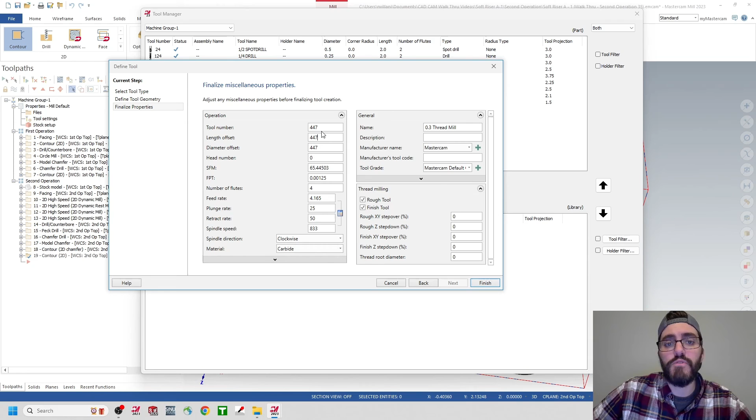Now we can hit next, and this pulls us into our finalized properties tab. If I wanted to, I can change my tool number. We think back to our default mill library, we had 446 tools, so I don't want to accidentally overwrite one of those, so I'll make this 447. If I click on the next box, it populates the next 3 fields with that 447th tool, and if I wanted to, I could set up my speeds and feeds.

So every time I pull this tool from the tool library, it will always pick these default values. I'm not going to make any changes here, so I'll just hit finish. And we can see that we've populated our tool library with that tool.

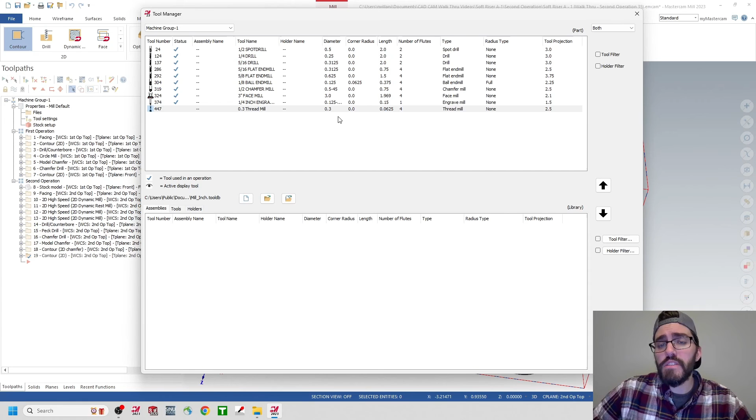So now that I'm done adding tools and don't want to make any more changes, I just want to save my tool library. I'll hit the green check mark from the bottom right corner of this window, and that'll save my tool library. So now when I choose a different tool path, I can pull from that tool library, which is now going to include that threaded mill.

From the top left-hand corner, we're going to go to our 2D gallery. We'll hit the drop-down menu to expand this out, and we're going to look for an icon called thread mill. This is going to be in the hole making section, the second row and second icon over. We'll click on thread mill.

This operates exactly like a drilled feature where I can select on edges of holes or diameters. So I just want to click on the top edge of the center hole here, and I can see that value is 0.3125. We'll hit the green check mark.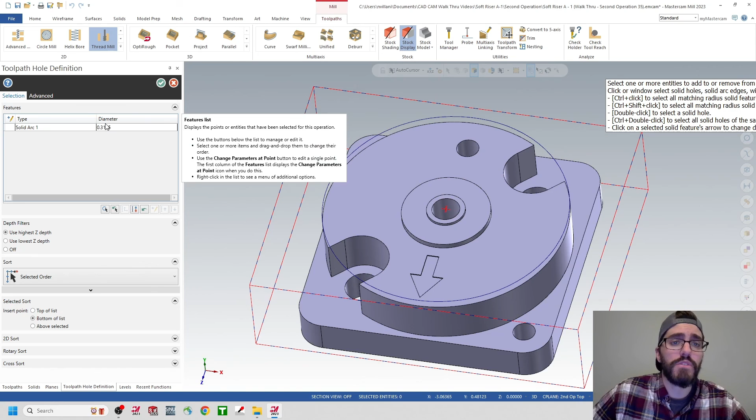This will open up your parameters window. We'll come down here to our tool tab, and we're going to look for that threaded mill we just added to our tool library. We're just going to keep scrolling down until we find that 447th tool. We'll click on that - that's going to be your 3/8 thread mill.

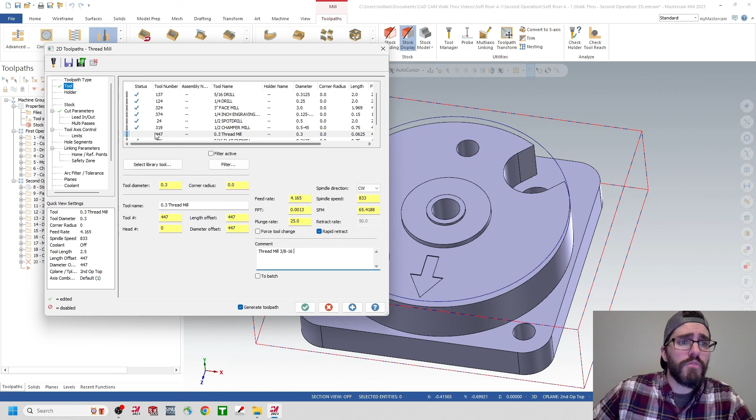And here inside this comment, I'm just going to say thread mill, and then I'm going to say 3, 8, 16. Then we'll jump over into our cut parameters tab. Inside cut parameters, the number of active teeth is equivalent to 1, and that matches what we set up in our tool library when we created the tool. The thread pitch here is going to be that 1 divided by 16, which is equivalent to 0.0625.

And then we have to clarify if this is going to be an inner diameter thread or an outer diameter thread. This is a blind hole at the center of the part, so it's going to be an ID thread. Now, one thing I like to do whenever using a thread mill is actually to override the geometry diameter, because I want to control the major and the minor diameters.

So I'll click both of these tick boxes on. The major thread diameter is going to be that 3/8, or 0.375. However, we want to account for some slop because the bolt itself is also going to be 3/8 or 0.375. So I'm actually going to say 0.375 plus 0.01, giving myself 10 thousandths of slop from side to side so that bolt can fit in.

And then the override minor diameter, that's actually going to be our tapped hole, which is that 0.3125 hole at the center of the piece. So this is going to be 0.3125, and that sets up your major and your minor thread diameters for this 3/8 by 16 hole.

Next, we want to make sure this is set to right-handed thread, and then below that, our machining direction - this is actually going to be a little bit confusing. If we were doing top to bottom, this would be an outside thread, or an OD thread. However, for an ID thread, this is going to be bottom to top, because we're actually going to try to climb mill from the inside, so everything is reversed. So this is going to be a bottom to top thread.

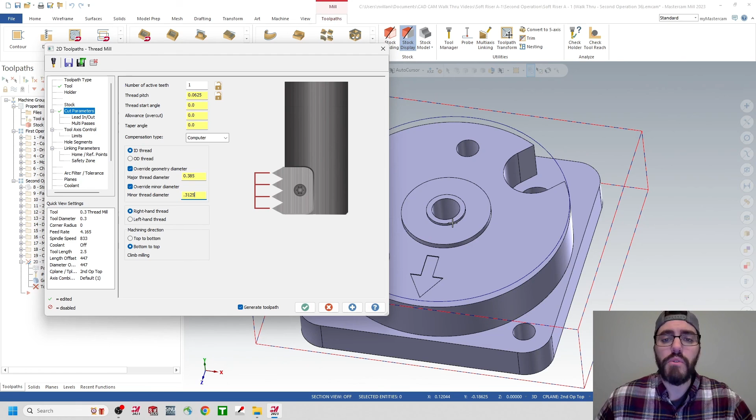We'll start at the bottom of the hole, and then we'll thread out. Next, we'll jump down into our lead in and lead out. Usually this is on by default, but if you did want to control your exit and entry arcs and angles, you can do so.

From here, we'll move down into our linking parameters, and we just want to make sure that this is reading absolute, absolute, absolute, and absolute. We can turn our clearance on if we want, and this is one of those instances where I want to change it from 5 inches to 2 inches, and we'll also make that absolute.

Next, we'll take a look at our top of thread. We'll click on top of thread, and we want to link that to the top edge of that 5/16 hole, so we'll click on that top edge right there. We are seeing that this is registering as 0, so we're all good.

Move down here into our thread depth, and we want to link that to the shoulder of that drill tip. So click on thread depth here, and I just have to rotate my part slightly so I can see the bottom edge of that hole. We'll click on that shoulder, and we're seeing a value of negative 0.625, or 5/8.

All right, so it looks like we have everything filled out here in our thread mill, and we can go ahead and hit the green check mark and see how this regenerates.

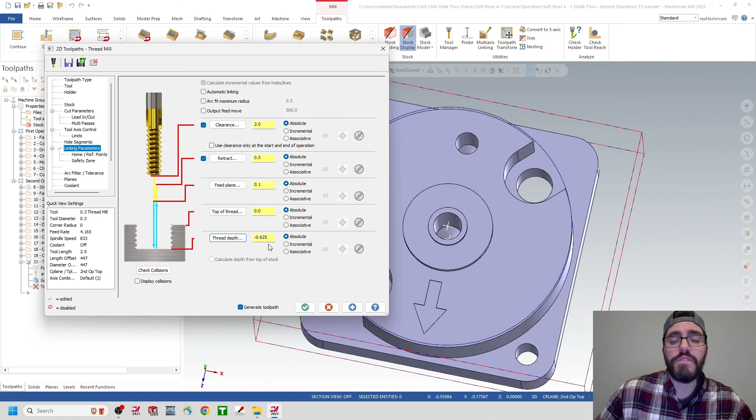All right, so it looks like we have that nice spiral toolpath for this thread mill operation, and I just want to see what this looks like in backplot. So let's move our part slightly, and then I can center this in the middle of my screen. I'll make sure that I have my thread mill selected here on the left-hand side in my operations manager, and I'll move to the top of the window and find those 3 little waves. We'll click on that, and we can see that our thread mill is being generated out here in the viewport.

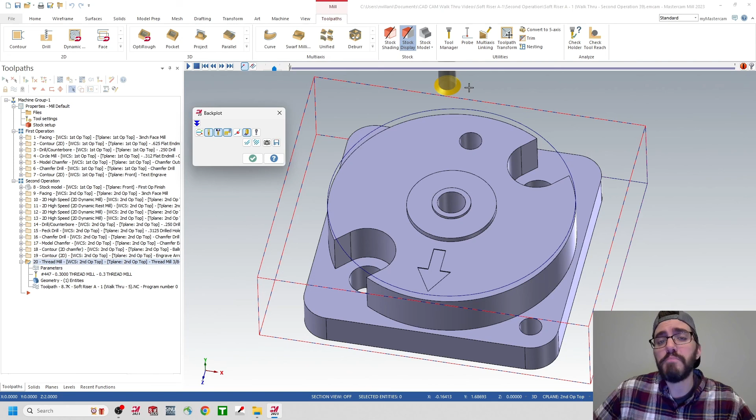Something to keep in the back of your mind while this is running is when we created this tool in our tool library or tool manager, we set this up so that it was only going to be 1 tooth, or 1 divided by 16 for that 3/8 by 16 thread, which was a pitch of 0.0625. And that's going to be represented here in yellow.

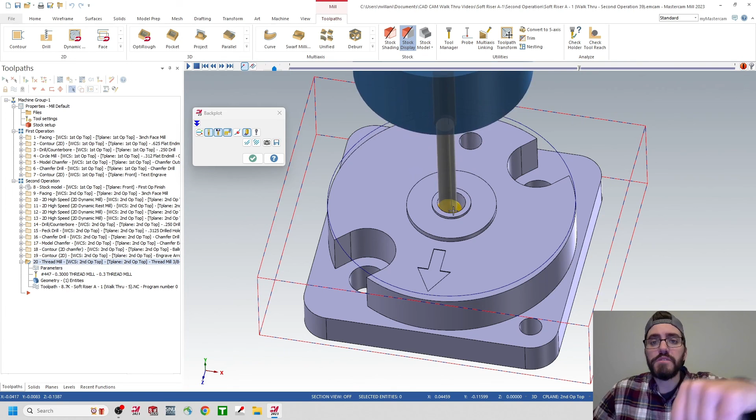So let's move to the top left of the window and we'll hit play. As this tool is plunging down, I want you to remember that we set this up so it has an OD of 300 thousandths, which is slightly smaller than the minor diameter of the thread, or that 5/16 tapped hole. That way we can move all the way down to the bottom, and then once we reach that shoulder, we can start to spiral out, which is going to be that climb cut function for this 3/8 by 16 thread mill. And then we'll retract out, and that looks really good for my thread mill.

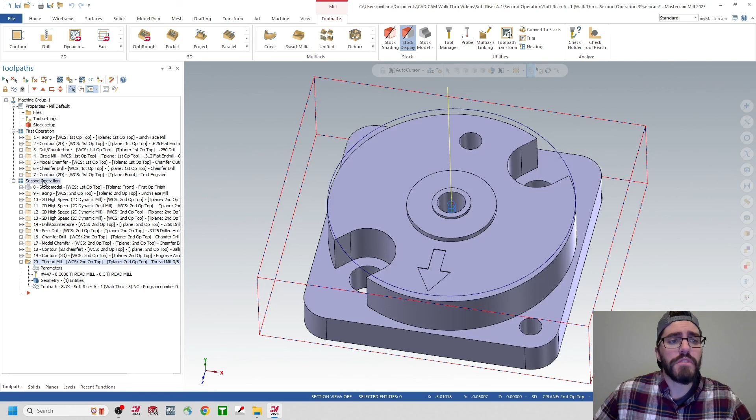So we'll back out of backplot, we can take a look at our entire program and verify. I'll click X on this window, and then we just want to move over here into the left-hand side in our operations manager, and I'm going to select the entire toolpath group for second operation. So click on that, and we should see a check mark next to each one of these toolpaths.

Then we'll move up here to the top of the window and find that half pipe looking icon for verify. We'll click on that, and once again this is going to open up that secondary window for us. I'm just going to let this play out to see the results of our toolpaths. So we'll come down here and hit play.

And we can see that we have all of our dynamic mills. We did our circular steps. We have our drills as well as all of our edge breaks. And we even came back and engraved this arrow down here. And we finished up with that 3/8 by 16 thread at the center of the part.

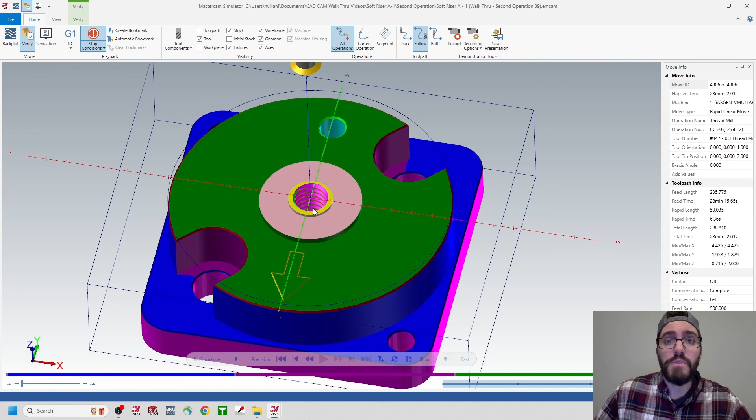So I don't think there's anything else that we can do here in second operation. I'm going to say this is complete. So I'll back out of verify and we can save the model. And that's going to finish up our complex second operation program for the Soft Riser A-1 3D model.